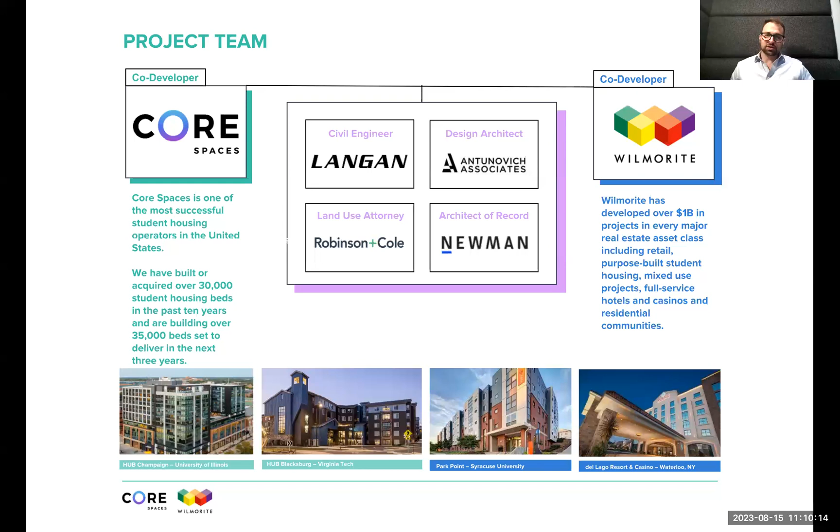We can turn it over a little bit. Yeah, let's go to the next slide. So a little bit about our business model, in case you're unfamiliar with the concept: we develop privately owned, purpose-built student housing, and we'll rent to anybody who wants to sign a lease. Our leases are a little unique in that they are by the bed and not by the unit. As part of the lease you get a bedroom and a lockable room, sometimes with an ensuite bathroom. For a 4-bedroom unit, for example, you'd have 4 different leases. It's very similar to how a dorm would work, but privately owned and privately operated.

Core Spaces owns a management company that provides the management services for our portfolio. You can see on this map we have projects across the country, operating under a brand called Hub—probably 20 different Hub branded projects nationwide. A few unique things: the leases coincide with the academic year, starting in August and running through July. All the units are fully furnished, and the buildings are heavily programmed with study areas and amenities we think would be attractive to students.

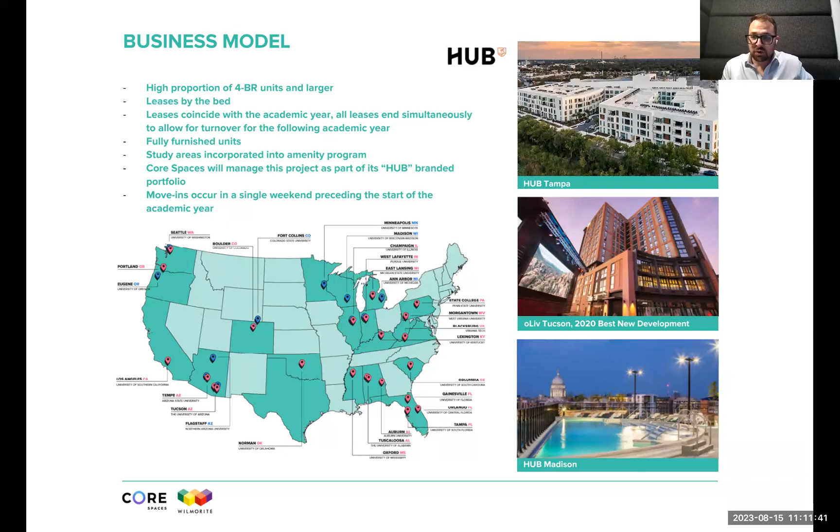And then move-ins happen all in one weekend before classes start. So it's kind of a unique product type, just to make sure that's out there.

The location of the site, I clipped the zoning map to show you where it's located and why we think it's an appropriate use. The gray is the University of Connecticut's campus, and the site is practically landlocked by the university. The Plan of Conservation and Development contemplates development at this site as a transition to campus with business and residential uses that support students. So of all the sites in Mansfield, this is a very appropriate use for this particular site, given its adjacency to campus.

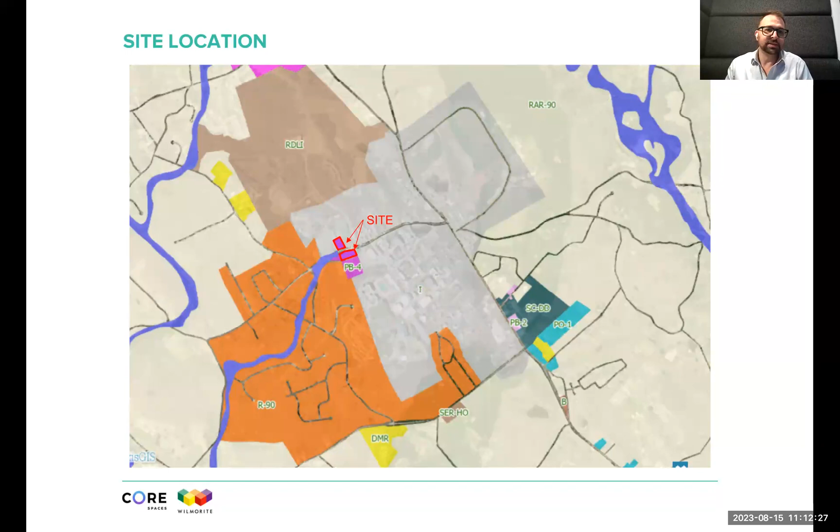Just getting into some site conditions. We have both sides of Eagleville Road. We'll refer to Site A as the south parcel, south of Eagleville Road, and Site B as the parcel north of Eagleville Road. Eagleville Brook runs underneath Eagleville Road at this stretch, so both sites slope downward towards the road, with about two levels of grade change. Site A is basically a wetland at the bottom of a hill, so it's a very challenging site, and we can only really connect to Eagleville on the right half of the site. But there is frontage on King Hill Road as well, currently improved with a small retail strip center that has a Subway and Sam's convenience store.

Site B is a commercial building that is the current home of Huskies Tavern, and they will actually be relocating to Site A as part of the project and staying involved.

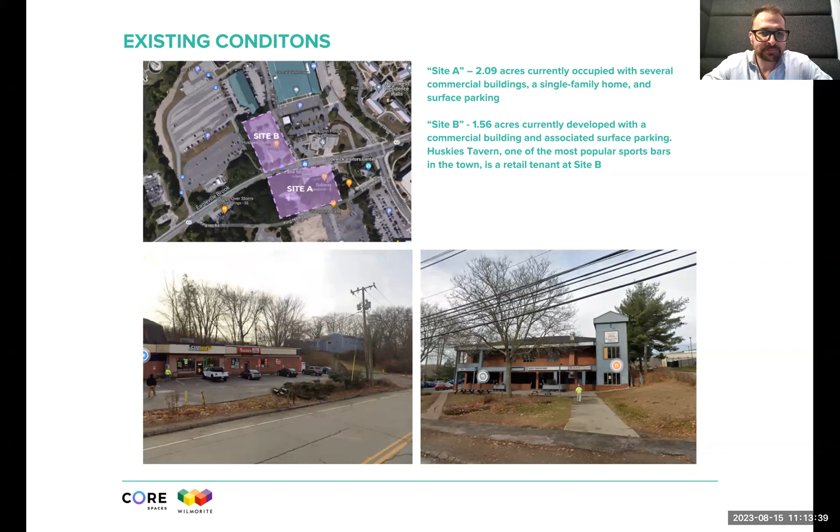My last slide before I turn it over to Antunovich. This image shows the initial renderings we presented. What you'll see going forward is imagery that has responded to a few of the peer review comments we've gotten in the meantime. But generally speaking, to get a rough idea of size and scale, it's roughly 450 units between two different sites, about half and half on each site.

You're looking at 8-story buildings, 5 stories of wood over concrete podium parking, so there's a parking deck underneath each building. We have about 13,000, almost 14,000 square feet of commercial space, about half of which is the relocated Huskies. We do have space for a few other tenants, and we're in conversations with those tenants to see if they want to stay on site as part of the project as we redevelop the space.

So with that, I'm going to turn it over to Brian. He can get into the particulars of the design, how we've conceptualized everything, and run you through it.

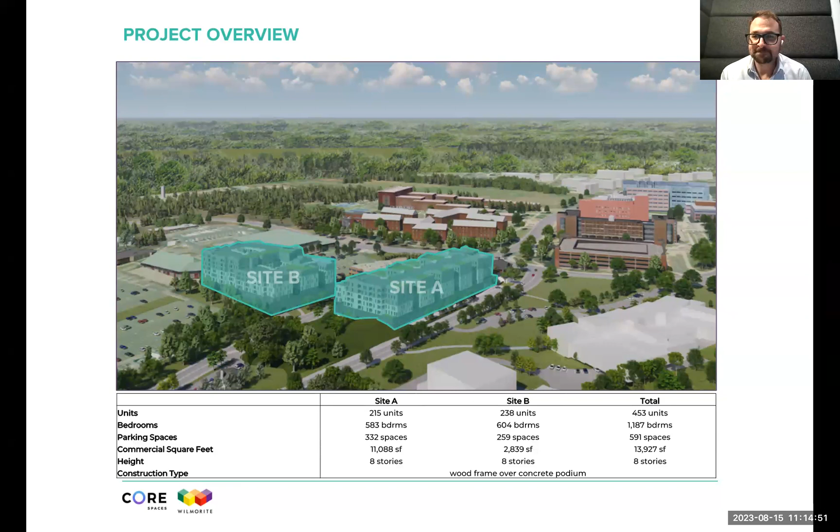Thank you, Andy, and thank you everybody for your time. Just a quick heads up, like Andy said, we've been responding to some of the planning and zoning comments as we go, and we've further developed the project since you last saw it in our original submission. Nothing major has changed—the massing has stayed the same, but we've begun to continue to articulate the exterior of the building.

Like Andy said, the site is situated in that northwest corner of the main campus, basically flanking the two sites on either side of Eagleville Road. Eagleville Road is the low point of the site, with Site A and King Hill Road being the high side, and the parking lots and university property to the north also being high.

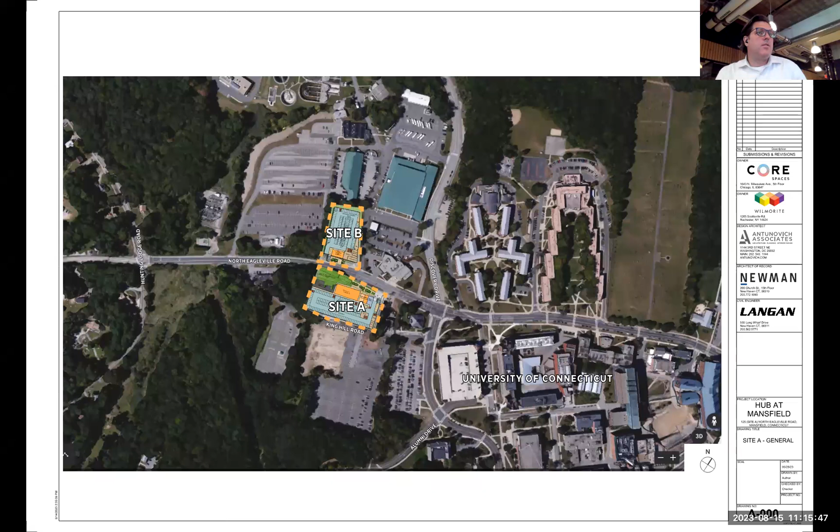So I wanted to start with an overview of where we started, maybe a 2-3 minute presentation. We looked at how the town started—a lot of New England started around mill buildings, textile mills, paper mills, those types of things. There's a beautiful elegance to a lot of those buildings, a very rhythmic method to the window openings, to the structure of the buildings, and just a beautiful scale to them. They broke them down based on function and daylight, but it created a very rhythmic and elegant building.

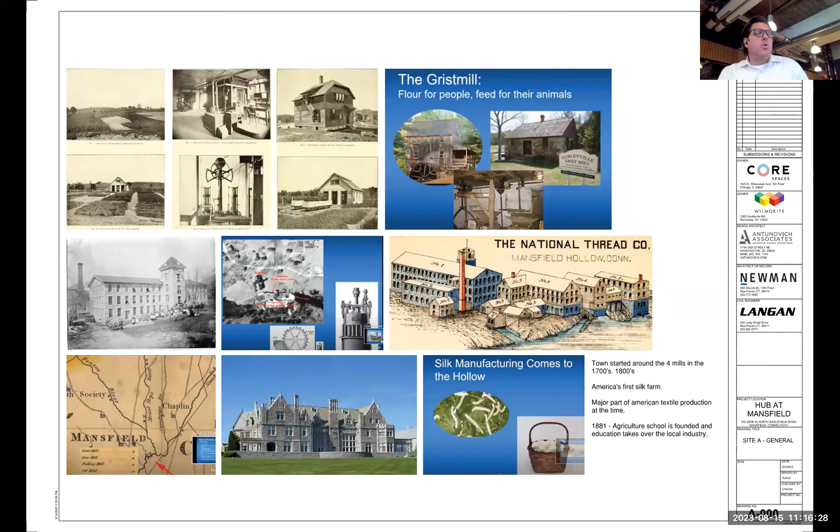So what we also started to look at was how some of those things began to replicate themselves in more of a modern sense.

Thinking about the textiles and the paper mills, the idea of variation within repetition was a quality that we started to take away and articulate on the exterior skin of these buildings, so we could provide some variables while keeping a regularity and keeping the massing understandable. We looked at projects in and around the University of Connecticut, as well as some of the vernacular you see in the surrounding areas.

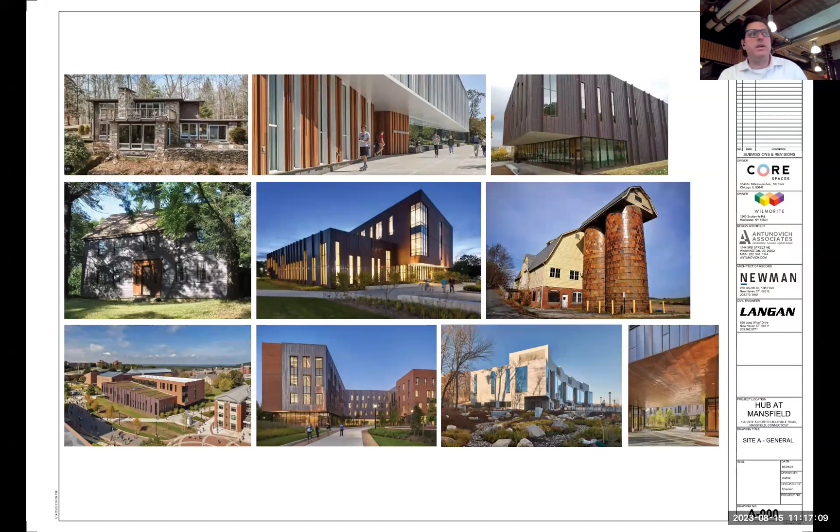And these are some additional ones that we were initially taking a look at.

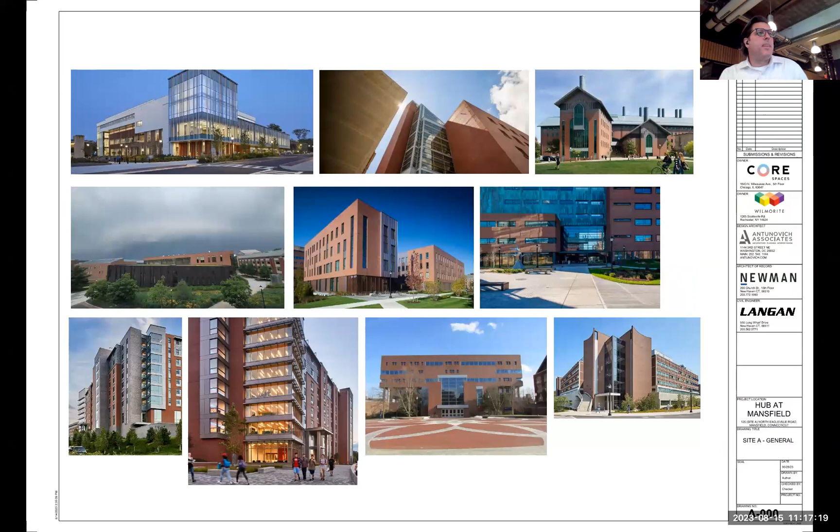And of course, obviously the culture. The culture is extremely important. It's the reason we're all here, and so we didn't want to let go of that. A lot of this building is about engaging and trying to make some type of connection to the university, as well as supporting the university's both culture and academics.

So we ended with a precedent where it was about creating a set of masses, a set of blocks similar to those original mill buildings, and weaving in, similar to the textiles, a little bit of variation within a very repetitious element.

So what I'll do is walk through Site A first, which is the building south of Eagleville Road, and we'll highlight the amenities, the plans, those types of things, and what we've progressed on the elevations.

And then we'll move on to Site B, which is a variation of a similar theme. It's a different type of building, yet we've tried to employ the same design approaches.

Our palette of materials, to start off, is a beautiful elegance and simplicity, again trending back to those mill buildings, where we have a base made of masonry brick. We're using a Hardie panel in a vertically oriented siding. We also have an EIFS panel where we're creating joints and control joints in a vertically oriented pattern. And then we're going to use a warmer metal panel cladding, showing a copper-esque color here that will also accentuate some of the entry points of the buildings.

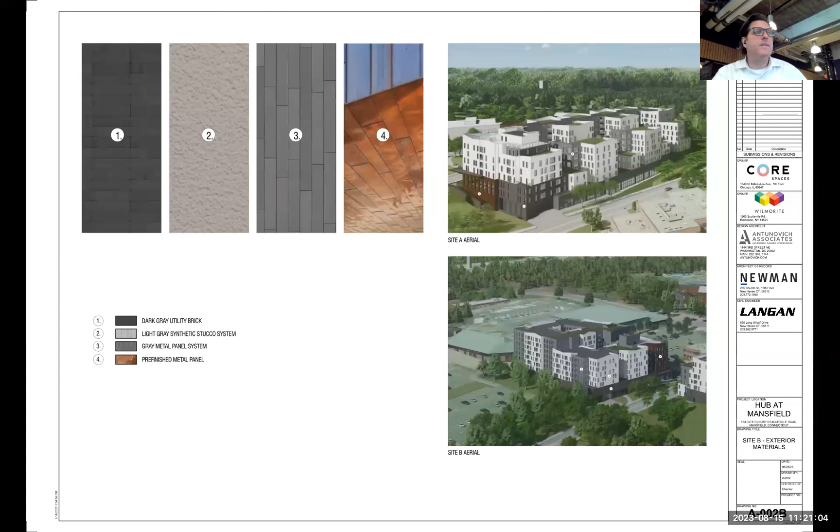So this is that overall aerial view. You can see here's that accent point with the warmer metallic color, and there's the second entry point right there. We're going to continue to zoom in as we make our way through the presentation. You can see the masonry brick that wraps the bottom, the darker Hardie panel, and the lighter EIFS color.

So Jennifer, we know we're currently working on getting Ted's into the rendering. We know it's not there right now, but we couldn't get it in since yesterday. But we are working on it. So the package you will see on the 18th will have Ted's put back in.

It is missing. We know it's supposed to go right about there, but it helps us kind of show the overall mass. Thank you for changing the rendering to more accurately show the context of the parking, et cetera, than what we saw.

Absolutely. And so what we've chosen to do as an overall, as you can kind of see from these images, is we have a very regular and rhythmic set of bays or bars on the building so that we can create courtyards and get natural light into the interiors of the buildings. And that is somewhat reminiscent of that rhythmic nature of kind of that original mill building.

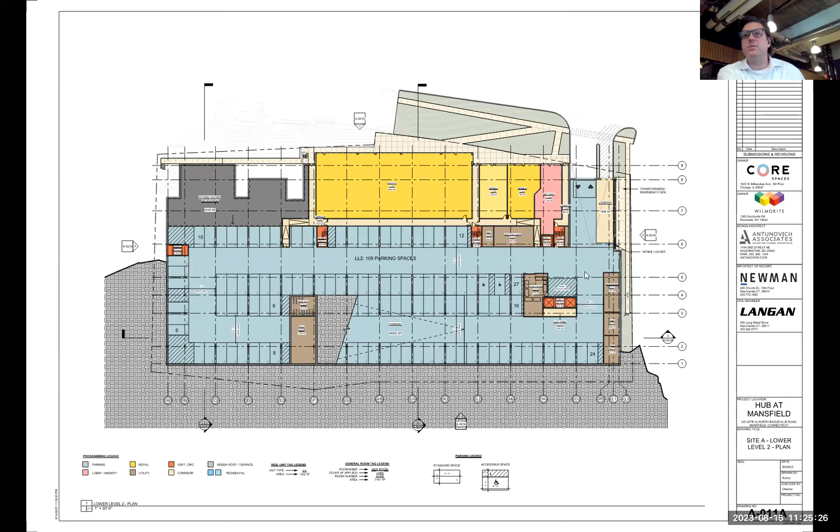Just to jump back, that's along King Hill. Right, we also have all of our loading and trash all done on site within the building. So actually the floor to floors on this lower level are high enough where the trash trucks can actually drive into the building and actually pick up the trash and then leave.

So as we make our way up, the liner units continue on the 3rd floor. This is the last floor of parking. You can see we have a 2-story space in part of our lobby, to continue to kind of accentuate and welcome. And when we get to the elevations and the renderings, we try to open up that elevation to kind of be a little bit more welcoming.

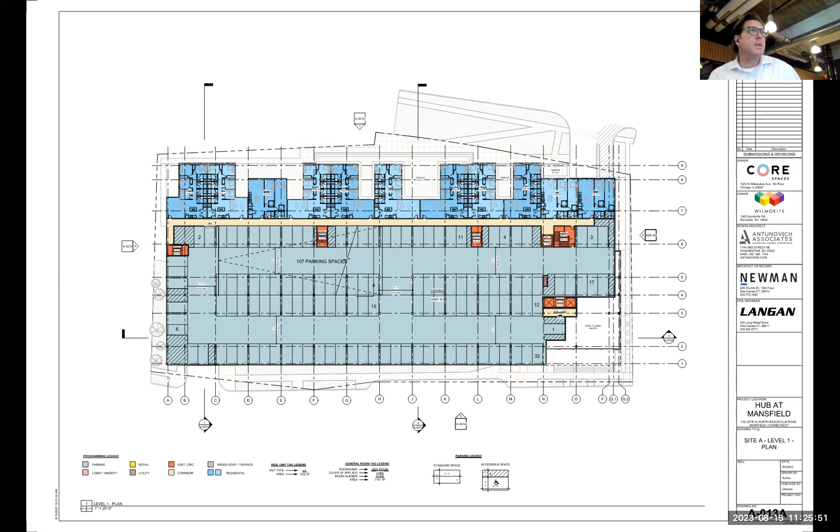And then as we make our way up, you can start to see we have these internal courtyards that have a series of terraces on them for some of the units as we make our way up. And can you tell us if there's access from the units to that green space, to those, are those little light yellow areas balconies? What's the access to the green space for the residents?

So the access to the green space is going to be a green roof. We're likely going to be using it for stormwater management. It'll likely not have much activity on it, but what you identified as the yellow spaces, those are terraces, so that somebody can go out and there's a designated area for that unit to be able to go out and actually enjoy the exterior.

They're not going to be able to walk on the actual roofing, the green portions. It's just to be looked at, and we're using it also for stormwater management purposes.

And then as we make our way up, this is the building starting to set back. There are going to be a few areas on that upper roof where we need small condenser units, roughly 3 to 4 feet tall, maybe 8 to 10 per area, that service those lower liner units on the 2nd and 3rd floor. We will screen them. We're going to do it on this level.

We're actually going to do both a setback, a 1-to-1 setback from the property edge, as well as potentially put some screening around it, so that when you're looking out upon those areas, you will not be staring at a mechanical piece of equipment.

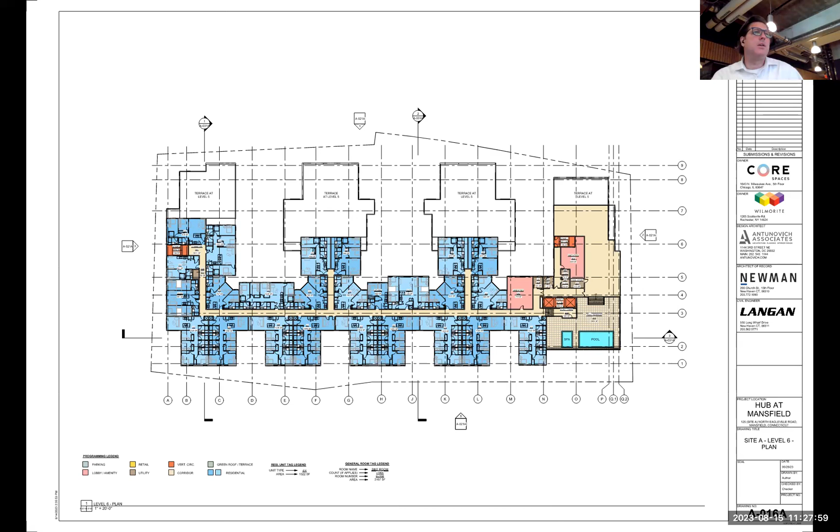And then obviously on the top, we are going to have some green roof as well. Similarly, we have large fresh air units that will be screened, roughly 8 feet tall once you get them on the curb. And all of the lower condenser units will have a 1-to-1 setback so that nothing will be visible from the street below.

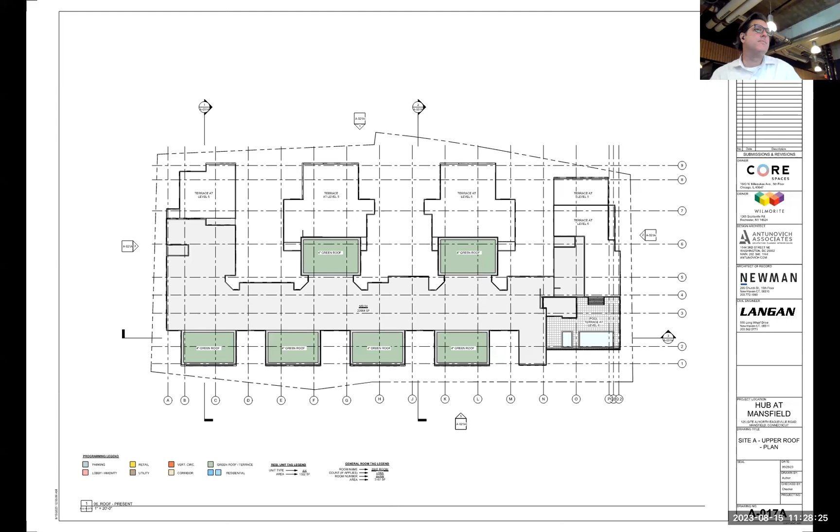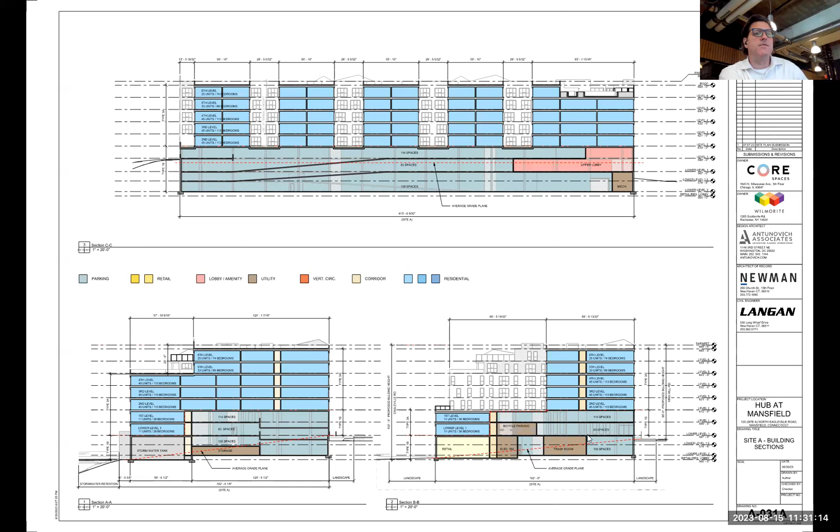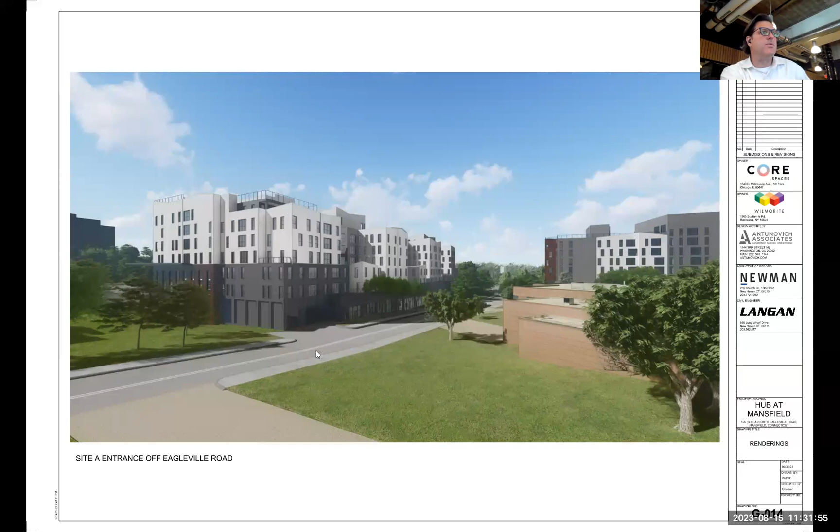So this is our break, and we come around the building from there. Here's that back entrance looking at Eagleville, looking up at Kinghill Road. This is the entrance with that warm metal element, the winged canopy, as well as looking into the 2-story lobby and the entry point.

This is that large wall we talked about earlier, which is basically the parking garage. We don't want to open it up because, one, I don't want headlights pointing out and shooting at the new science center across the way, and also we think we can play with the articulation of the masonry, that beautiful rhythm of a mill-esque building, and cover the foreground with ornamental trees and ground cover to make it a pleasant experience along Eagleville.

So I'll just point out on that rendering, although you corrected the parking in the other view, it's not corrected here. Oh, you mean the adjacent parking? Yeah, I've got to get some plans of that. I apologize, we need to get the new plans from the science center.

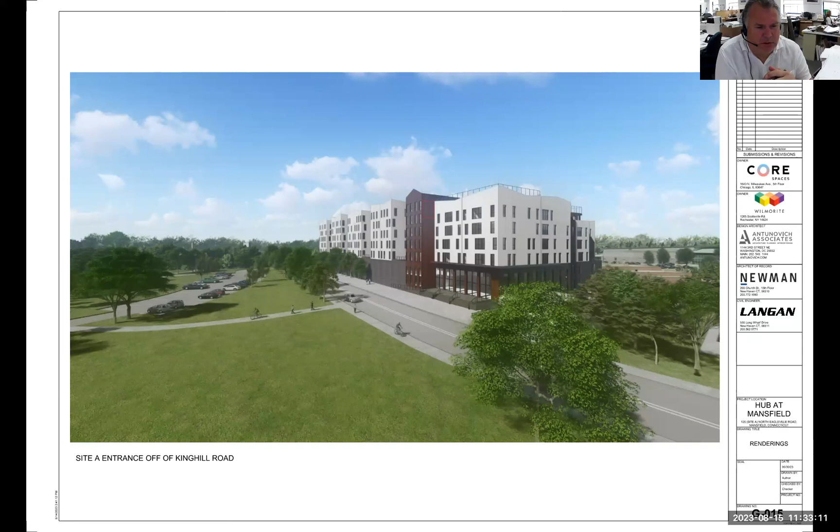I have a question, just so this rendering accurately reflects what's actually there. I can't remember, it's changed so much in the past year. Does it look quite like this though? Not at all. I didn't think so.

Here, I actually pulled up the plan. It didn't look like this before, and it doesn't look like it now either. You're talking about this one right here.

So we tried to mimic that kind of curved parking lot that's there. It's fairly close to what is there because you can't see the science building beyond. Our site is right here, and so what we're seeing is roughly this small wedge of green space in the foreground. So if I jump back, that's us trying to mimic that parking lot and that green space.

We don't have the landscaping quite right, we can probably upgrade some of that. Potentially this distance isn't as large as we're illustrating, but it's fairly close. In this rendering, we wouldn't see the new science center, it's several hundred feet to the left.

It's safe to say on record you are showing in these renderings that we will not see any mechanical equipment popping up above the roof line all the way around the building, correct? Correct. We do have some elevator overruns and things of that nature that, depending on your vantage point, this one you can see there's really nothing, and I'm probably floating about 30 feet in the air. So we're very confident we won't be able to see any mechanics from ground level walking on the sidewalk.

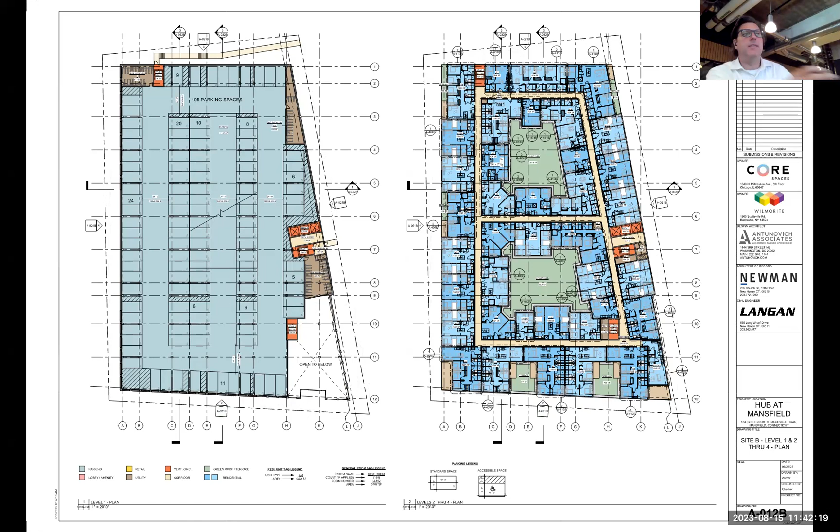As we make our way up, similar to building site A, there are three levels of parking, and then we make our way up to the residential units as the building rises. Near the top, they set back — that white area should actually be hatched as a roof terrace, our public amenity on the roof of this building.

There is an additional roof terrace similar to site A on this building. Can you zoom in on the either side, left or right, the corridor?

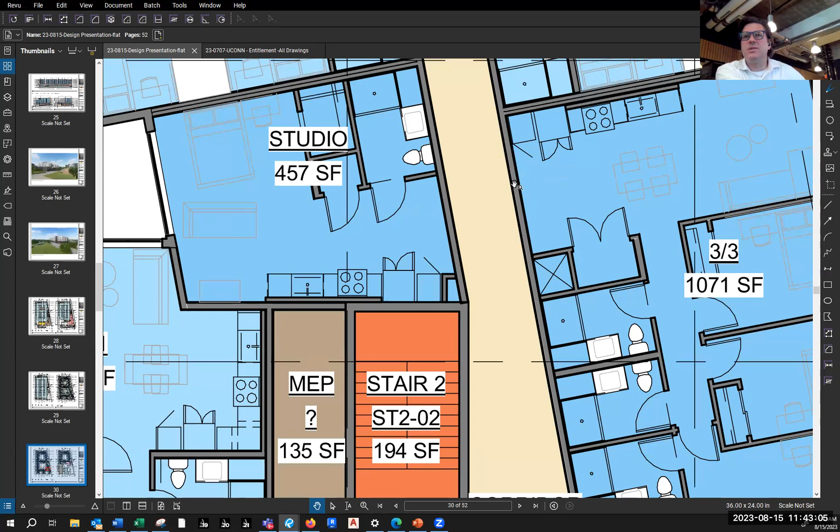Where are the doors to the apartments off the corridor? We can add them in — I recognize we don't have them. That was one of the comments they sent us. We did the unit designs and all of those things, but we still need to add that. So by Friday, we'll have those doors located on all the plans. I noticed it's on a number of plans, not just this one.

So making our way through, we also have green roofs on both the upper and lower level, similar to Site A. We're going to screen the large fresh air units and set them back, and we're also going to set back all of the lower, smaller condenser units.

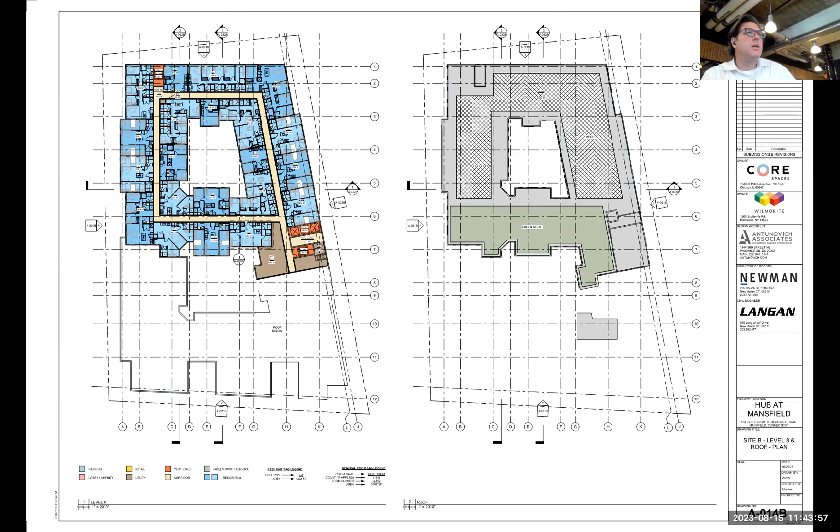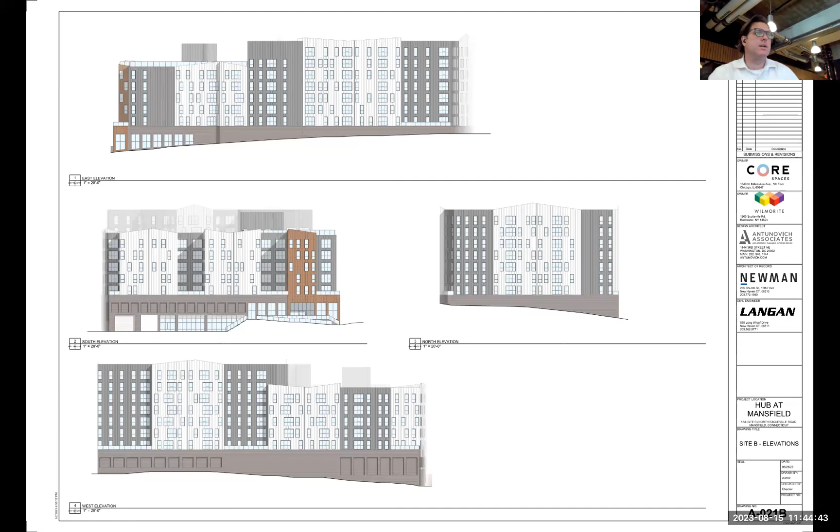On this elevation, you can see we employed the same window organization strategy: in the darker Hardie panel skins, very regularized windows stacked relative to the unit plans, and in the lighter warm gray components, we randomized them to get that variation within repetition. This building didn't have as much in-and-out, especially along the two sides facing Ledoyt and the parking lot, so we used light and dark elements to break up the massing. Similar to Site A, we landed that warm metallic color right at the front door.

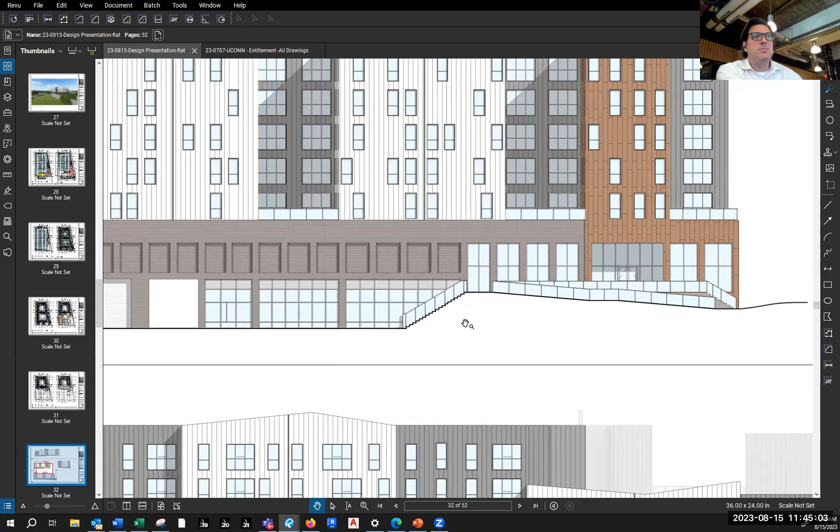This is kind of how the grades are fleshing out. You can see that's the retail space below, there's the stair, that's the handicap ramp, and that's the front porch.

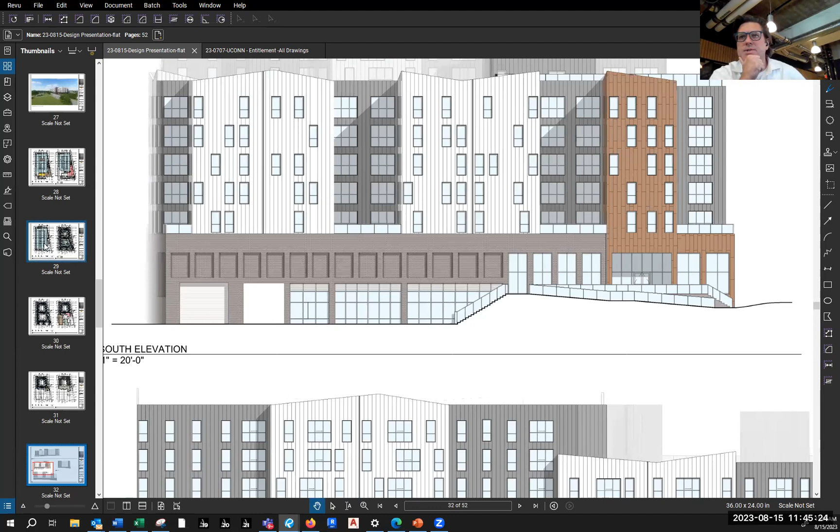Those two garage doors — does the one on the right go to the first level and the one on the left go up very steeply to the second level? It doesn't go up steeply; all the ramps inside the parking garage are roughly 5%, so they're not steep at all because we're parking on the ramp. But is it correct that the left door goes directly up to the second level? No, they both enter in right here.

So this is more like a loading dock and allows a loading or trash truck to pull in and out. This is a two-way entrance for the patrons and the residents.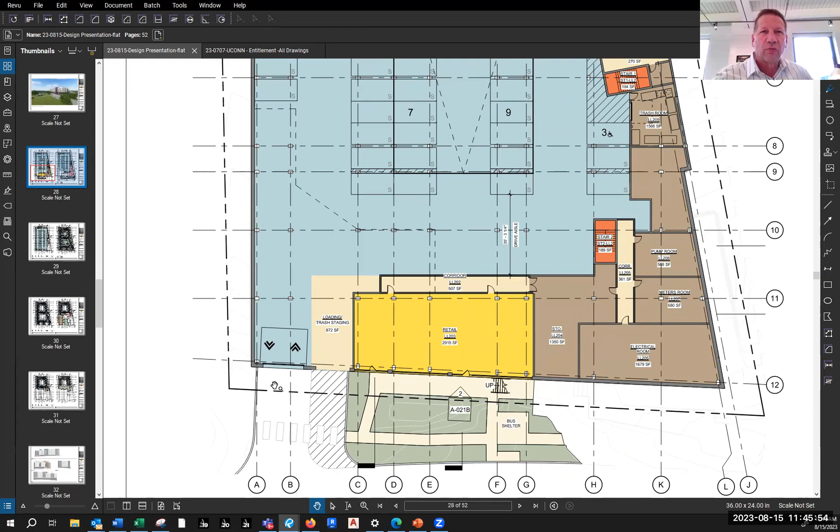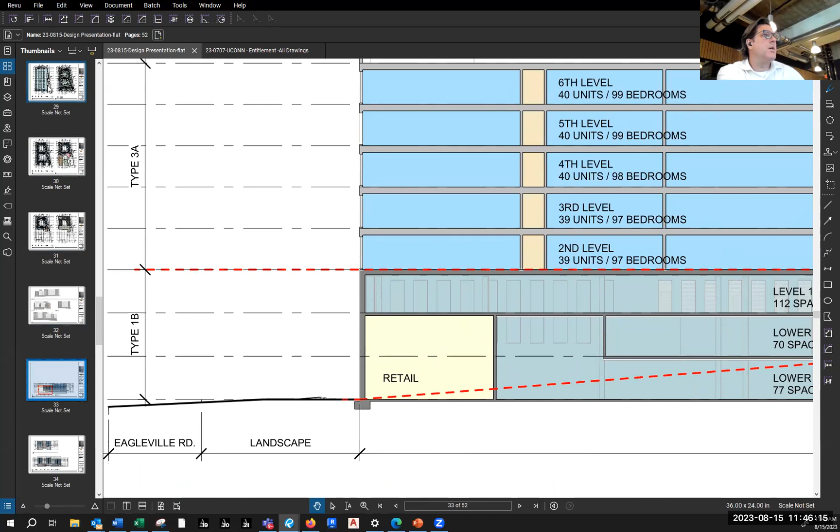One thing that may not be clear is that when you pull in, it's actually two stories to allow for the height of the trucks. There's a section, and if you go to the second floor, you'll see there's an area carved out to accommodate that height. On the plan it might be helpful to see. The other garage we just gave more height on the first floor to accommodate it because we had the retail, some big retail spaces, but this one we had to carve that out.

Thanks, Joe. All right.

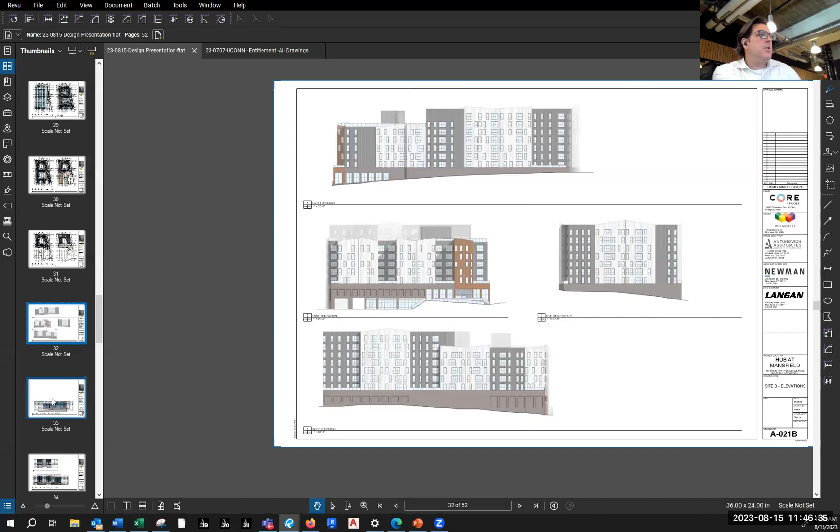Okay, so again, here is the section of the building. We're starting to illustrate the overall stacking of it — it's five over two. These are some of the internal courtyards, and you can start to see the sections and the ramps. This is that retail space on the lower level; it's actually a two-story retail space, though usually it's still just one story.

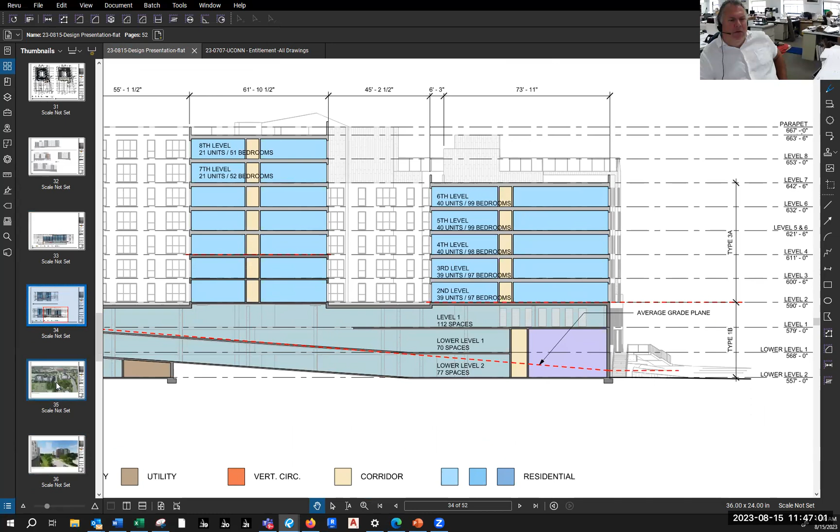What are the floor to floor heights between lower level 2 and level 1, with 112 spaces? That's 11 feet.

Now you know that slab has to have a certain rating, right? Yep, for the parking, and there's going to be a lot of structure in there. Yeah, it's the transfer deck. So that's going to be a low ceiling. It got stepped down there too for that extensive green roof.

We think we can still maintain above 8'2" on that level, but none of the handicap vans will actually be on that level. So the 2 lower levels are the 2 accessible levels we talked about where the accessible parking is.

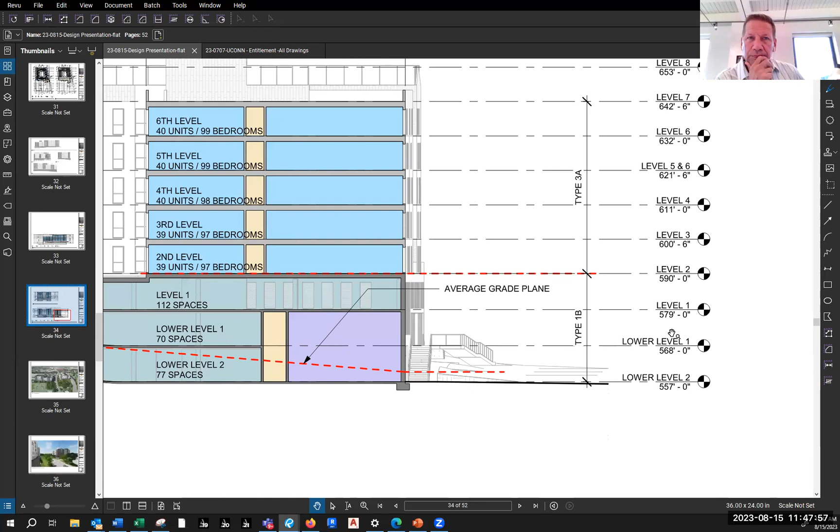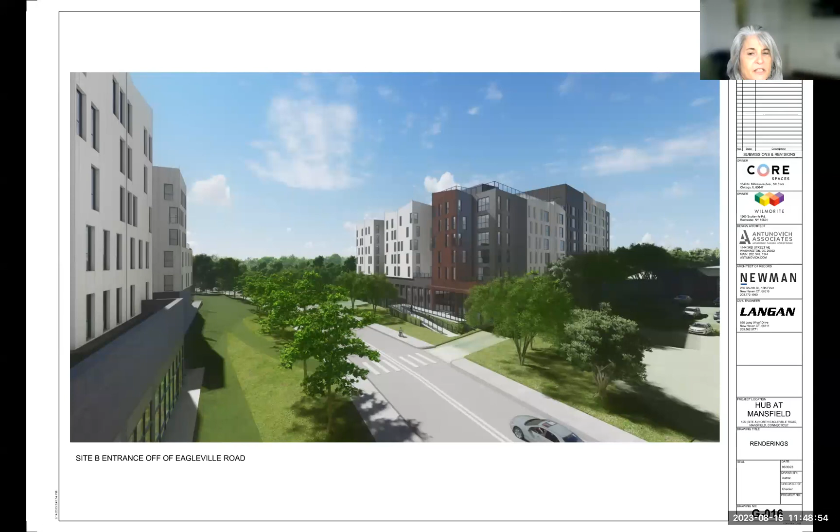Just orient me here, please. Is this heading towards campus from King Hill Road? This is actually, let me jump back a slide. If I were standing, I'm roughly in the middle of the road looking back at B, so I'm looking west. This is me looking east back towards the campus, you can see the campus off in the distance. This is the other side of the building, so the firehouse is basically right here. And I'm looking back at the building, with building site A in the foreground on your left.

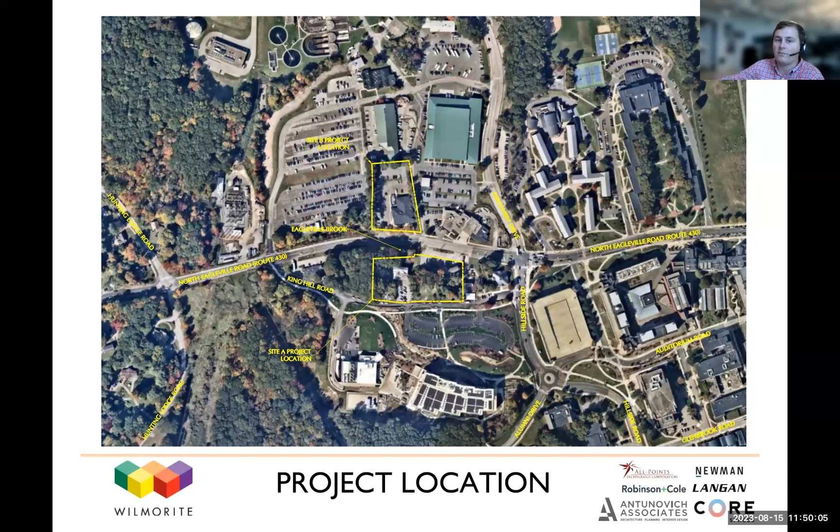Site B is to the north of North Eagleville Road, and Site A is to the south. We're going to start talking about Site A. That's just the addresses, 125 North Eagleville Road and a couple parcels on King Hill Road.

So the majority of the site is actually building. As Brian mentioned, we have the main entryway on North Eagleville Road on the very east part of the site, and that's going to be for most of your cars and all of your ambulance for emergency or trash pickup.

But we also have a vehicle entrance on the southwest of the site, and that's only going to be a car entryway. We have a car drop off down there as well as the fire lane that we've coordinated with Mansfield's fire department.

We do have sidewalks and stairs available all around the site, just for access to be able to cross here, because in the existing site conditions there were dirt paths and other ways for students to cut across here. So we're trying to keep that similar to make it as easy as possible.

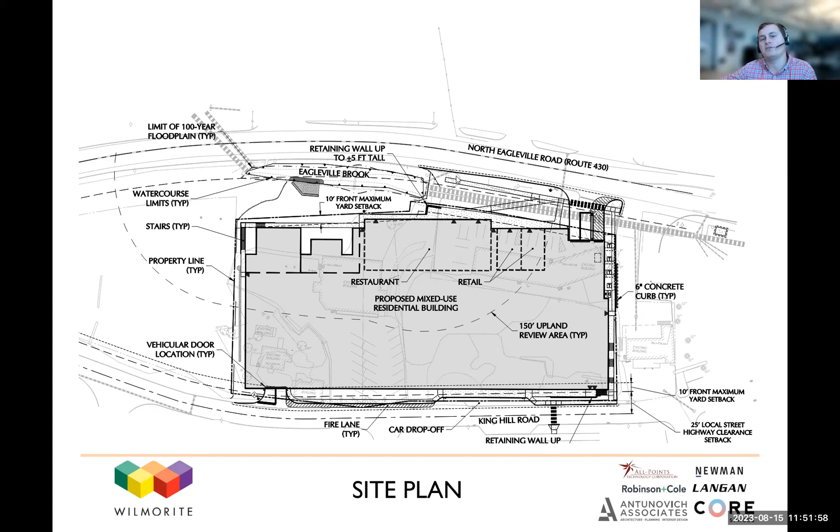We also added a crosswalk to the south of the site so that we could get to the new bus stop that was part of the project to the south of the site. We'll talk about more of that in a second.

Now, our site is part of the Eagleville TMDL district, so we tried our best to make sure we were implementing as much stormwater management features as possible to be sure the water that empties into Eagleville Brook is as clean as possible.

The major way we're doing that is our green roof. But in addition, we have a below grade detention system to allow for flows to decrease from the existing condition, as well as a water quality unit, just to be sure we are cleaning the water as much as possible.

We also have 4-foot deep sumped and hooded catch basins, as well as French drains on the east and west of the site to allow for infiltration.

And that's going to be very important, right? Oh, definitely. And all the pipes have been accurately sized, all the flows have decreased. We actually decreased all the flows in all the watersheds.

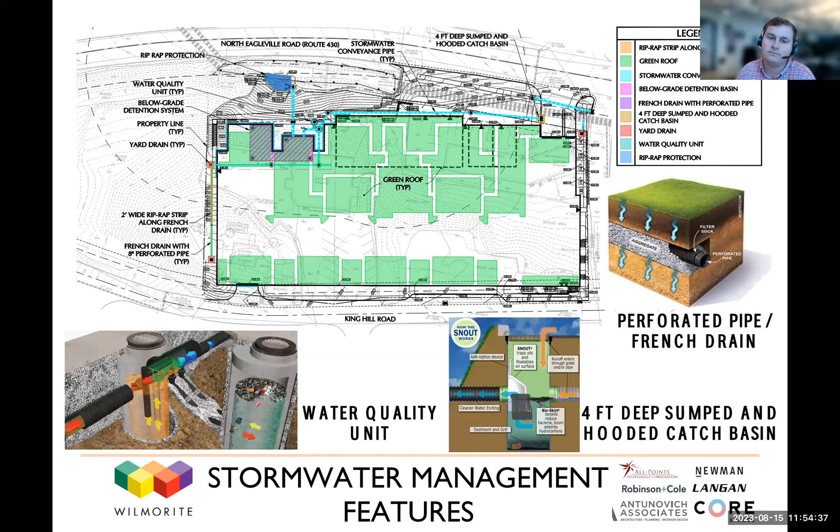So just to walk through Site A: to the north, near Eagleville Brook, we collaborated with All Points Technology Corporation on planting restoration in this location, as well as all sheet notes and directives for restoration and maintenance. Moving to the north, we brought in curvilinear plantings that are shade or partial shade tolerant, adding trees and vegetation for height.

To the south along King Hill Road, as Brian walked you through, in areas with more limited windows and more solid facade, we've integrated some sweet gum, some serviceberry, and more structured planting at the ground level to break that up a bit.

Near the drop-off, close to the main entry, we've provided about a 10-foot, face of curb to facade, generous drop-off area. As Brian walked you through in both Site A and Site B, we're providing that 10-foot area for all the movement and access of residents.

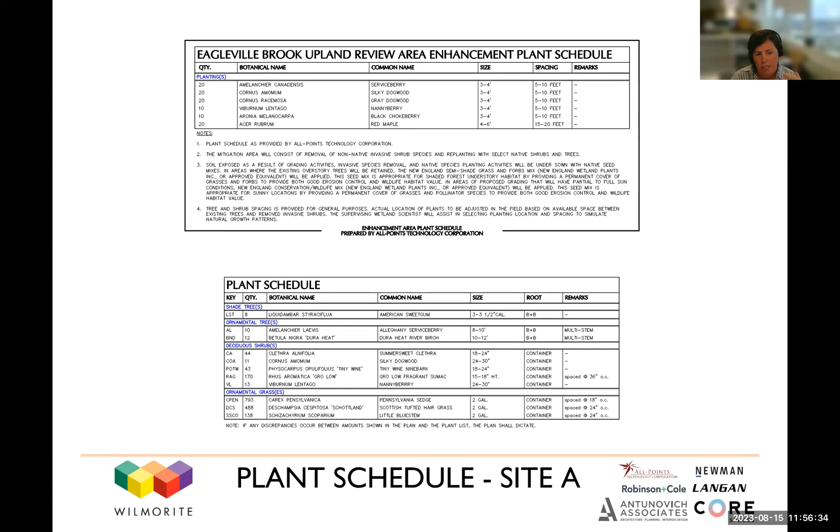We're also adding, on the next slide, a green roof plant schedule. This is recently planted on the Wesleyan University campus that we're working on. We collaborated with GreenGrid Roofs to come up with this mix and this grid system—they come in 4 inches or just 2.5 inches, so they have a variety of options. You can see the gravel provides circulation as necessary for maintenance and access.

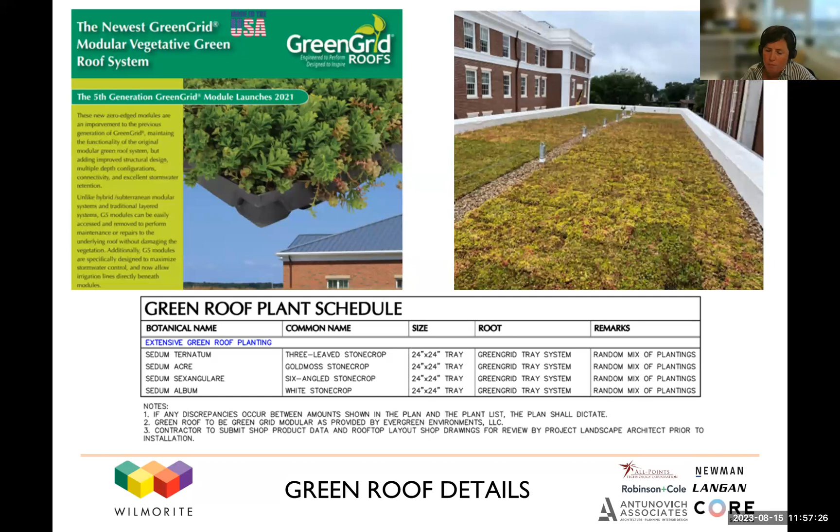It was a combination of sedums, and really working with these manufacturers to assure we're integrated with the latest technology, the latest plantings, and the best plants for the Northeast and for the project specifically. If we keep going, on to Site B.

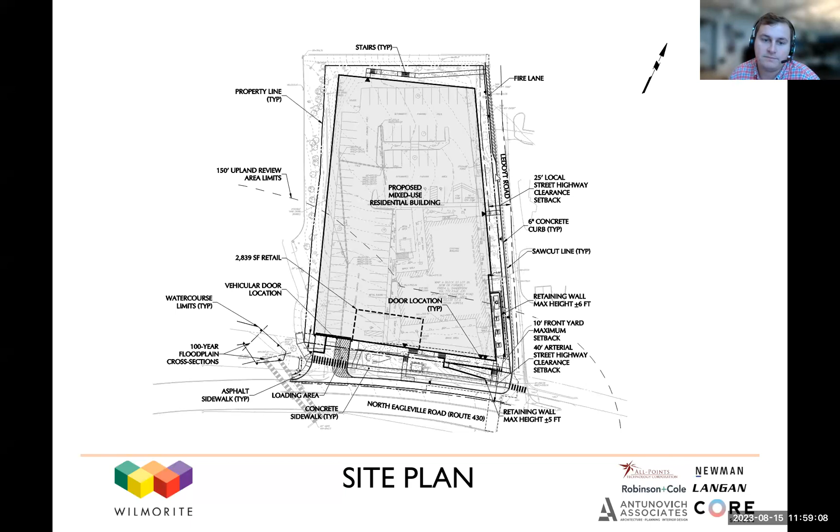Yeah, we could go to the next one. Also very similar to the last site, we have our major green roof, as well as the 4-foot deep sump and hooded catch basins—another water quality unit used before going into the detention system to allow for cleaner runoff, and then the detention system to decrease those flows into the existing Eagleville Brook discharge point.

On the site, we also had room for a rain garden in the front, which Kristen will get to a little more with the planting on that. But can you just talk about that detention system a little bit—is that inside the building? Is that in the parking area? What's going on there?

So it's actually below the building. Brian might be able to give a little more detail on that. It's a pre-manufactured system that we worked pretty closely with Langan on, but it will be below the slab on grade as you enter into the parking garage. Yes—sorry, Kathy, you're on mute.

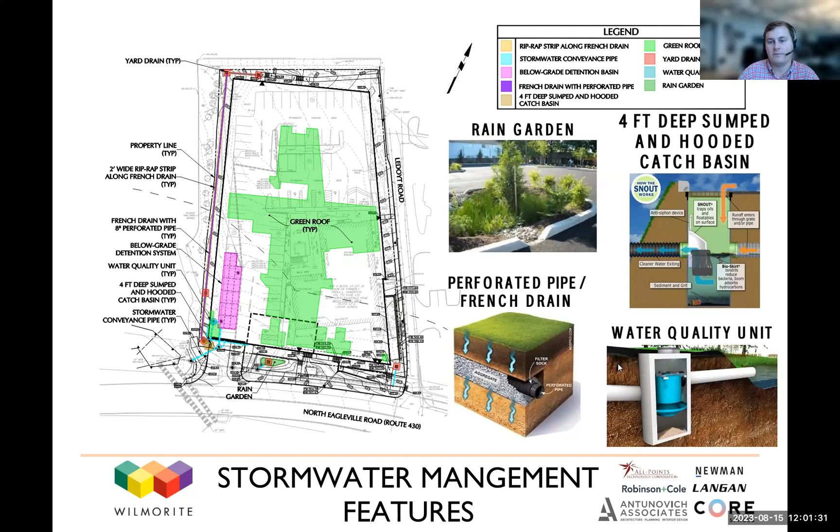Brian. And then also similarly, we have the perforated French drain just going along the northwestern corner and down the side of the western part of the site, just to help with runoff going west and keeping it on site. And then I think we go on to the next slide.

Hi again. So to start off on North Eagleville Road, we have a combination there of some larger shade trees and then serviceberry, shown as some of those smaller circles. The serviceberry creates a nice multi-stem interest in the winter, and a bit of an airiness when it has leaves on it, a nice native plant adjacent to the rain garden, placed strategically along that facade.

Yes, thank you. And then to the east of the building, I believe that was pin oaks. So we have a nice row of pin oaks in that corner, to the east side where you're pointing. We have a series running along the building facade there, about 10 pin oaks in the corner, especially where it's a bit more solid, creating a nice canopy and breaking up that architecture.

And then on the west side, we're assuring that we're maintaining those existing mature trees that range anywhere up to 18 inches, on the adjacent property. So looking at that tree protection, and then more understory plantings where we have a meadow mix, with a mix there of plantings.

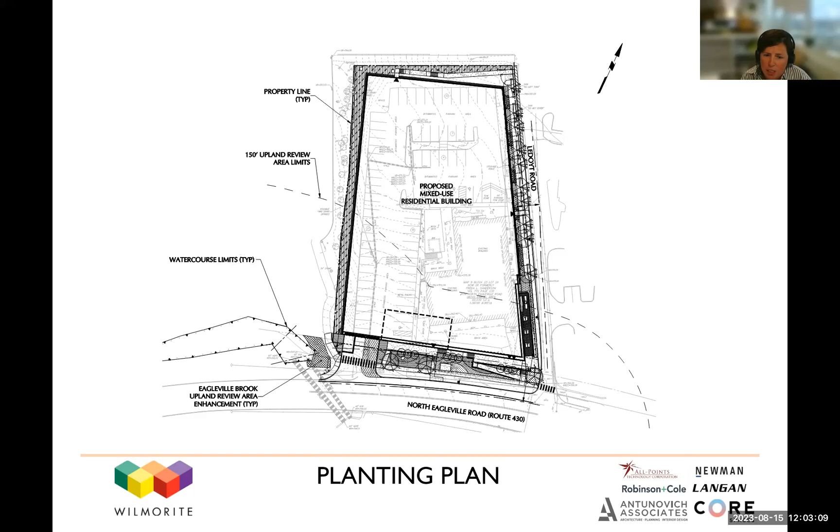That pretty much covers the planting design. If we could go to the next page. This again is just the combination enhancement plant schedule, our detailed plant schedule that we include on our sheets. And then the green roof, same idea, similar to site A.

So working to assure we have a great mix of plants that thrive in the Northeast, which we've done on a lot of recent projects, with a small, lower profile, 4-inch profile. So you have some very steep areas that you're planting. What are you planting on those? And how do you, I mean, we've all seen that runoff in other cases. How do you plan to maintain that?

So in many areas, we have tried to work towards a 3-to-1, so where we could plant some trees, some larger vegetation to have that rooted in there. We then do have a meadow mix. So working with the contractor to assure we've had successes on many other projects, and the timing of planting, assuring we're not placing that on major rain events that we've been seeing recently. But yes, working with the contractor to assure that, and we have that noted in specifications and on our drawings.

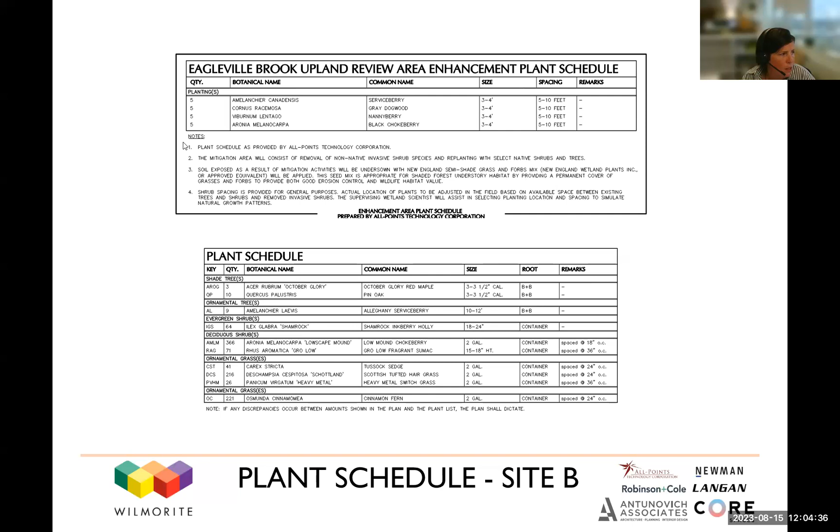So what's the plant material on those steep slopes? Let's go to site B. So we have this labeled as Meadow Mix A, which we have noted, if we plan to go to— actually we don't have this in the slideshow, but I can just list off. So it's a combination of native materials, a mix we've used on many campuses and many projects. It's a combination of, I'll just list a few, blue stem, some perennials, grasses, and a variety of native materials, but the majority would be switchgrass, blue stem, and some wild rye, Virginia wild rye.

So that's located, just to be clear, on the west side of this building. Do you see that hatch right there? That's where that meadow mix that I was just describing is located. In other places, they're individually planted, where you're seeing the other hatches—those are individually planted, either ground plantings or shrubs, mainly shrubs that are listed in the plant schedule.

I have one question. Yes. There's a group of—this area, the parcel that is owned by UConn that you abut, it is my recollection that it has very mature trees. So how are you going to protect those trees on the UConn property?

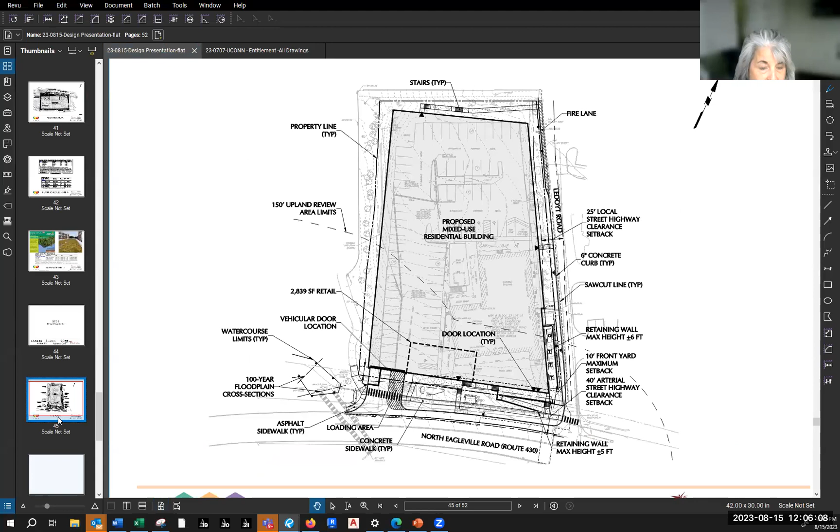You're talking about this side right here? Yeah. So we are noting tree protection fencing that we would work on day one, identifying some of those root zones and working with the contractor day one to assure we are protecting those trees.

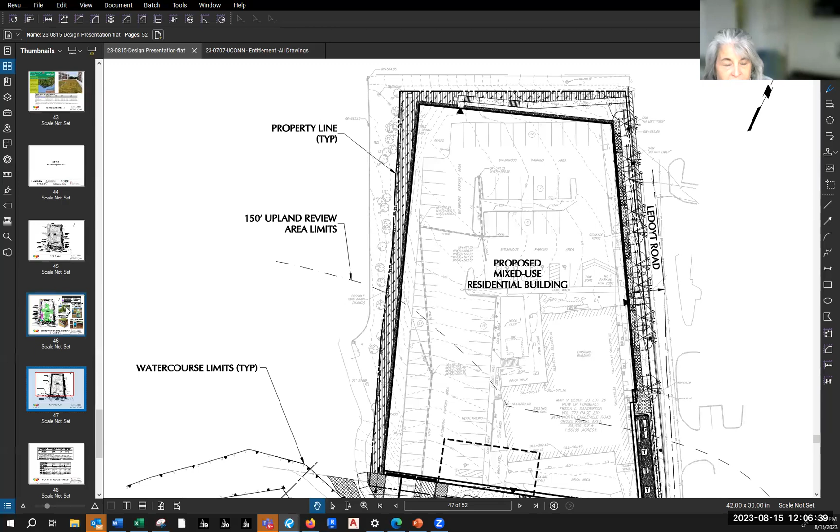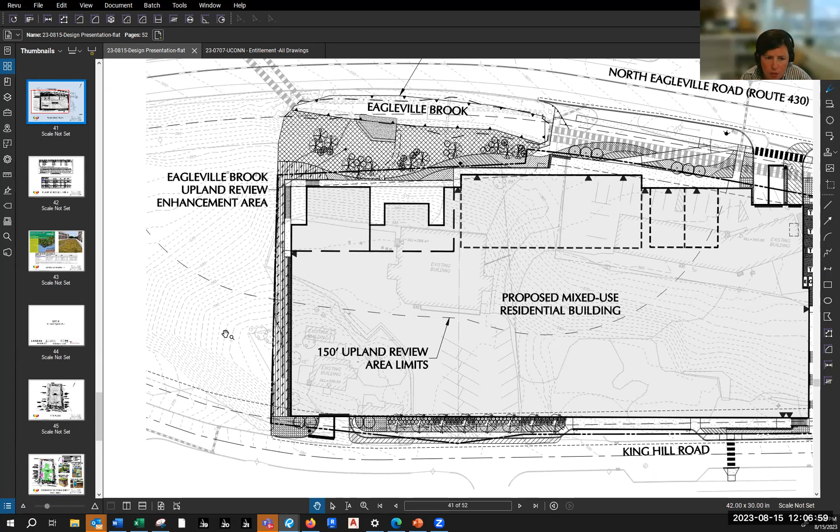Okay, great. And then also on the other UConn site across the street, site A, you're doing something similar? Yeah, it's a similarly steep slope with mature trees. So all grading is within the property boundary, no impact outside of that. And then yes, I think if we zoom in there should be protection fencing. If not, we can add that in this upcoming resubmission.

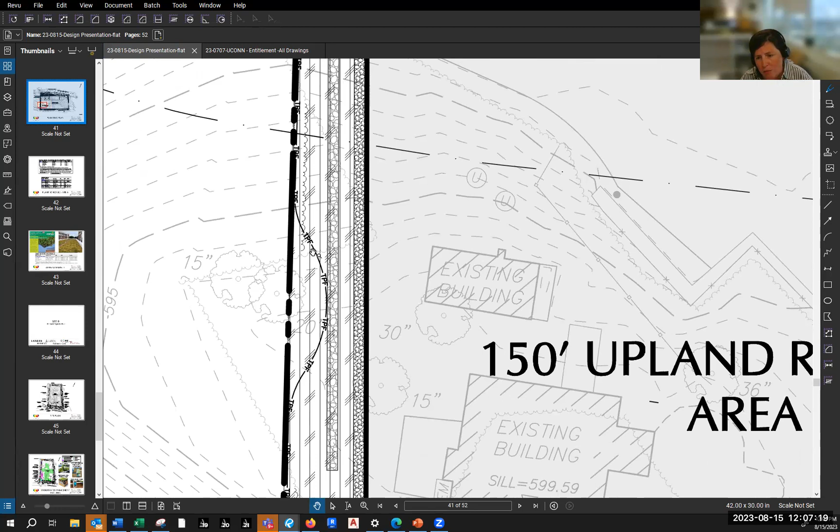And then what's not noted is site lighting. There were some comments that came back, which were great. We're already modifying, and we'll be having that in this upcoming submission. We'll have some modifications to assure no light spilling onto, limiting or eliminating light spill onto adjacent properties.

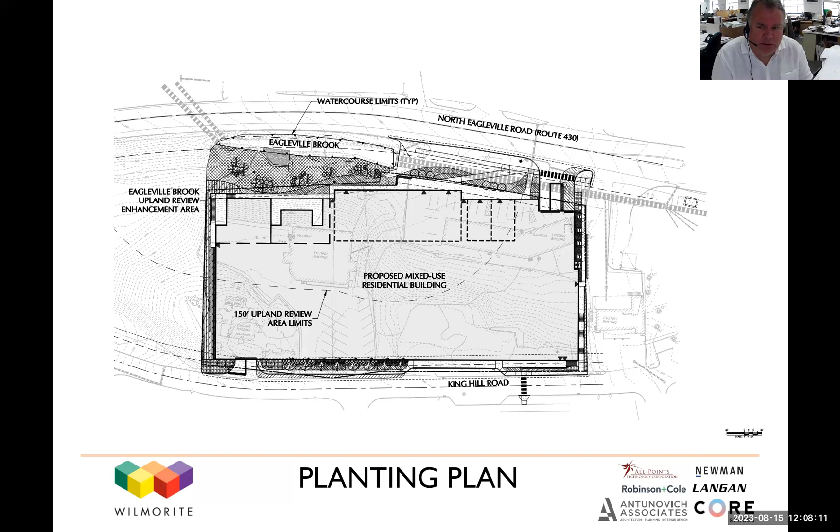Besides it, this whole project feels pretty dense, very dense. I was reading the Weston and Sampson report, and I just want to be assured that you're going to address every one of those items that they have in their report, correct? Correct.

As I said before we started this meeting, we had a meeting with Weston and Sampson and the applicants, and the applicants will be submitting revised plans and comments, I believe, on Friday. So, correct.

And presumably those will address the comments we have yet to make. Yes, we'll make sure that those are on the record. Whether or not the applicant team is able to address them by Friday, we're not sure.

And if we have an issue, we'll absolutely let you know that we're working on this one element, because I don't want to miss the 18th deadline. But if you make a comment today that we're not able to address in the next 3 days, we'll certainly let you know what we plan to do and at least write a narrative.

Well, I have one question about the plant materials. Because some of those plants will be planted under the building overhang, or in areas that might be a bit shady. Yeah, on the north side. Have you thought about plant materials that might be shade tolerant? I understand there's some meadow mix that might not be impacted greatly, but for the taller trees, are they shade tolerant?

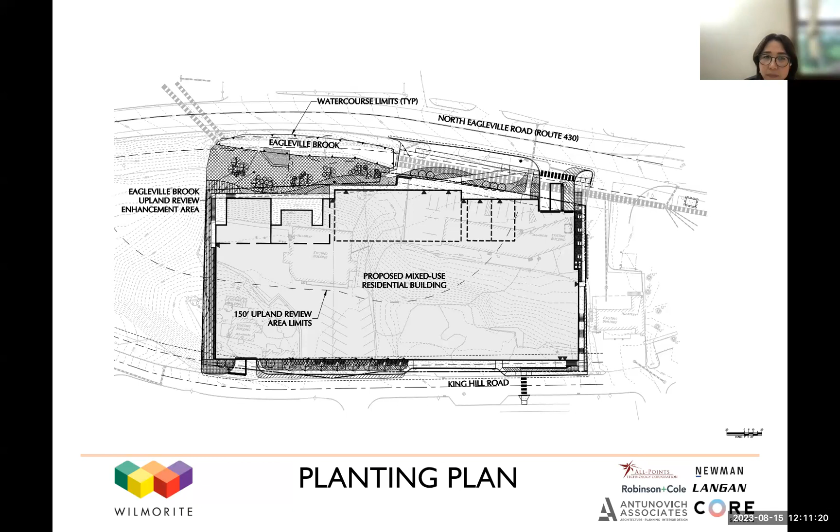So I'm just wondering, I know somebody mentioned about the surface materials and the imperviousness versus perviousness. Have you ever thought about the trade-off between the increase of impervious cover versus the green cover that might be provided by green roofs? Could you repeat that last part for the group?

Sure, so you have green roofs in both buildings. And I know that's not intensive or extensive, so you can have ground covers such as sedums and other species, which might be helpful for runoff that will eventually be going to the Eagleville Brook. And at the same time, you're establishing a building which will increase the imperviousness. So have you calculated the trade-offs?

So the green roofs, the intention was both from an aesthetic purpose, and as you mentioned, reduction in impervious surfaces, also heat island reduction, so that is a green space, having that more natural material. And then from a treatment standpoint, an improvement in the outflow. So really we thought about it from multiple angles there.

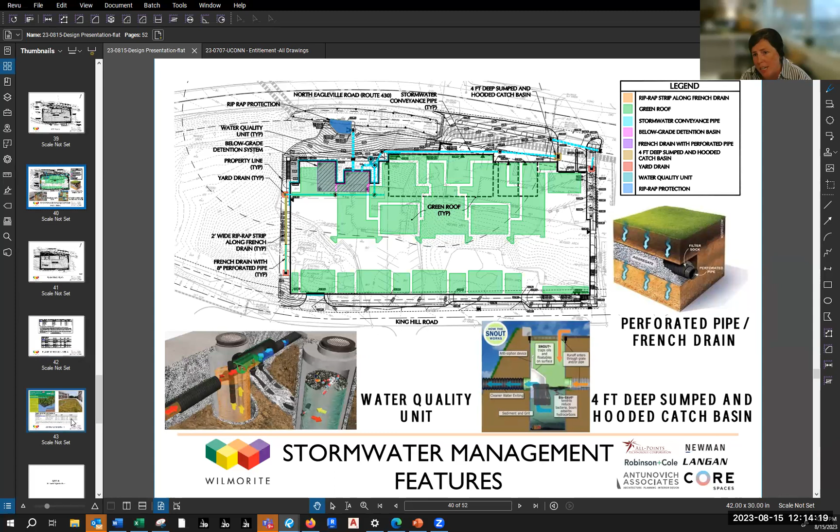How do you maintain them? We have, for instance, that picture we were showing, there is an integrated irrigation system. The whole idea, the intent, is that they're limited maintenance. The access, you can see, for instance, on the upper right, having that aggregate path - I was just walking on it the other day. So there's that access in the center and on the edges with the gravel, and otherwise the planting really is intended to be low maintenance.

You can see, I think it might be in the brochure there, that you can have irrigation lines directly beneath and within the modules, so they're integrated into the system. Again, the whole idea is the hands-off ease of maintenance.

I would definitely, instead of using the word could, be more assured if you thought about that, because I've done a number of schools in the state where if maintenance isn't part of this, whether it's intensive or extensive, you still have to think about it, because the last thing you want is nothing growing and it becomes an awful eyesore out there and a fire hazard. So I would definitely consider that. I think it's a great idea, I love green roofs, but you have to make sure you fold that maintenance component in.

So is there any sort of maintenance plan that was submitted, Kristen? I don't believe we included the notes - it's something we could note here. I would absolutely do that, make sure it's called out. Oh, my apologies, we do have landscape maintenance notes in here, and we note during construction, lawn maintenance, but we could add a few notes for the green roof itself, which we could add and take note of.

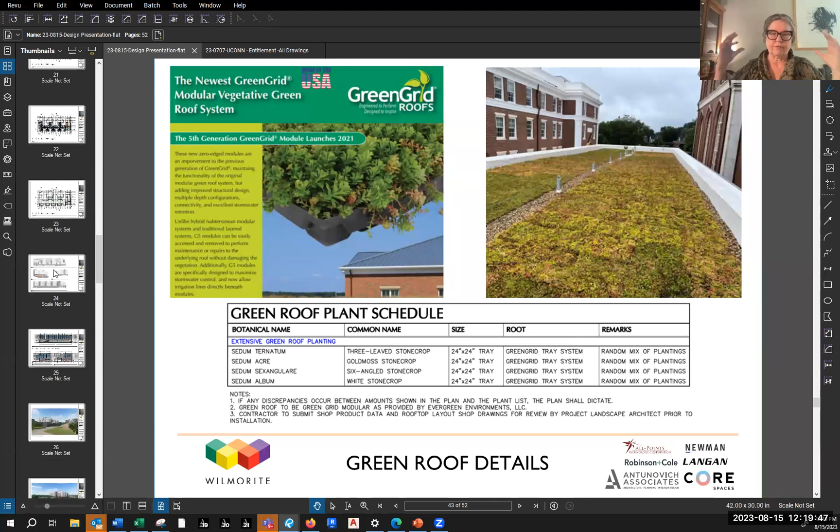There's some interesting things. On the other hand, I think there are some serious things that still need to be addressed in the design, and those happen at the ground level. Can you go back to the elevations? So all of the renderings you showed us are from an upper view, and for those of us who aren't birds, we'll never see the building from those views. We'll see them at the street level.

And I think there should be renderings of all of the buildings at the street level. I think that the trees obscure the street level in almost everything you've done, and that's the most important thing to the community, is how the buildings look at the street level. I think you've made a little bit of progress on the Eagleville Road commercial here, but it still doesn't read as a commercial entrance. The majority of the space along the ground on all of these buildings, if you walk around, is either a blank wall or a very, very steep slope leading up to the first level.

I am very skeptical about the maintenance of materials, although I'm far from the expert on that, and that steep of a planting area. So I'd like to see further studies. If you look at all of these walking on the ground level, you'll see that only at the little bit of commercial space are you looking, this is building A, at anything. The rest you're seeing either a steep slope going up or a blank wall.

If you go to building B, again, little bits of things, but mainly you're looking at either that very steep slope or a blank wall. So I think that there's a way to articulate that better at the ground level, whether it's arbors with planting, whether it's really studying the steepness of that hill and how it's planted and how it's maintained. Sun Yan might want to comment more on that, and I think more articulation of the commercial space, a clearer sense of where that entrance is.

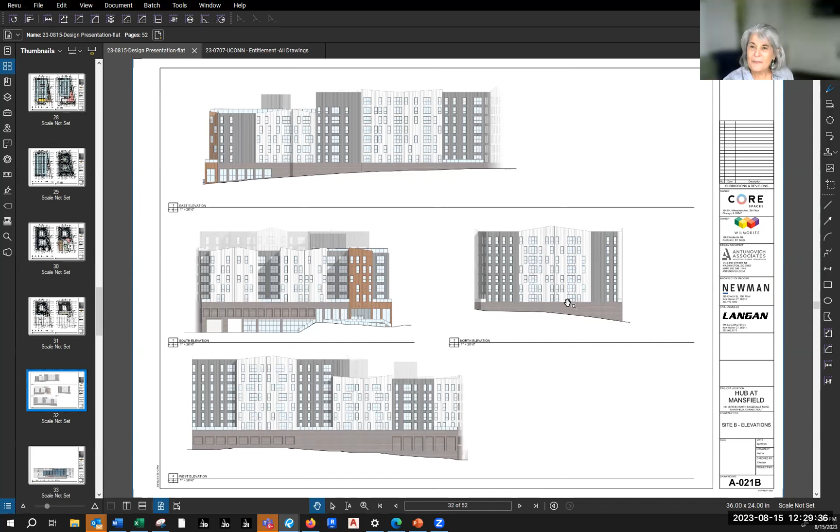Jeff, do you want to go? Yeah, I think I sense where Kathy's going with this sort of lower section. If you look at the north elevation there that's open, it's just this big blank facade. I don't know if that's on the street side, but if you go around the building, maybe there's a way to do something a little bit better there, especially along some of the major roads. So it's definitely worth looking at.

The only other thing I was thinking too is that mechanically, is this going to be heat pumps? What is this? What are you planning on? Is there any sort of solar?

Have you considered any other kind of sustainable heating, cooling strategies, or are these heat pumps? What are you planning on doing?

So currently it's a dual system. The main fresh air of the system is through a DOAS, and we're going to duct that from two units up on the roof, down through the corridors and into each unit. Then each unit has a heat pump system. Our DOAS units take the exhaust air back through the DOAS unit, so we can get recovery units and things of that nature. The DOAS coupled with the heat pump gives us great efficiency.

It cuts down on air interchanges between units, so passing of pathogens has been a big issue over the last couple of years. This seems to be probably the most economical as well as the best system to install in a multi-family building.

Do you have an estimate about how many heat pumps? I know you can bulk up units. We're not doing VRF, so it's going to be straight one-to-one. Some of the smaller units can be stacked, but for the most part it's going to be one-to-one - every unit will have a small condenser on the roof.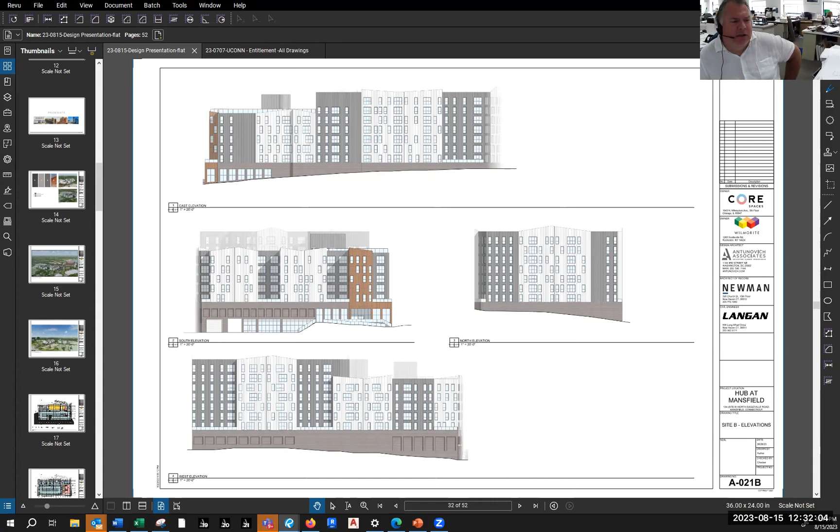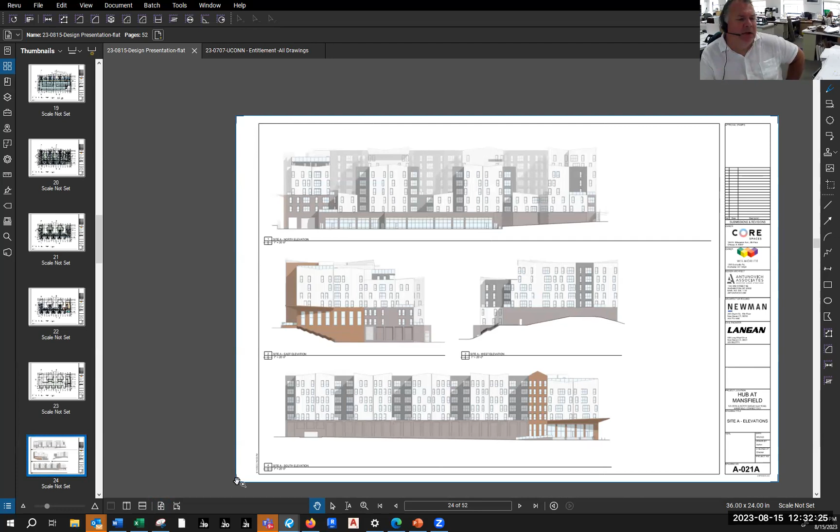And I like the way you've used the materials to break up the things. I would be concerned a little bit about the EIFS, but I know what you're up against - you've got to maximize everything you can maximize, and then not have a flat facade. You're going to use material, light and dark and textures to break it up. So I get it, but the transitions are going to be critical.

Absolutely. The goal for us when it comes to the waterproofing, I'd love to have the substrate of all of that material be continuous, and then we have our fluid-applied air barrier on that and everything's built out from it.

There are downsides to EIFS, but just to clarify, we're using a drainable EIFS system. It's similar to a brick cavity wall where it can actually weep, so we don't have condensation and all the things you've heard about EIFS over the last 15 years. We also get that continuous insulation quality, so we can create a greater building performance by using EIFS. We're going to get an R11 or so just in continuous insulation - that's not including the remainder of the assembly.

I can't wait to see a fitness center in some of these buildings where the students themselves actually exercise and generate power and electricity for the building. I don't know, Andy, is that something we could do? We get the pedal bikes and they just power a couple workstations in the lobby.

Anyway, that's all I had. Thank you. You can leave out the pedaling bike part. Right, I'll leave that one out. Yeah, that was your suggestion.

All right, how about So Young, can you chime in? Sure. There's a lot of overlap with what the previous speaker said, but I think this is a good location for the redevelopment - it's going to be a busy street with pedestrian traffic and maybe an opportunity to drive more human traffic. So I think it's good in terms of the location and the nature of the development.

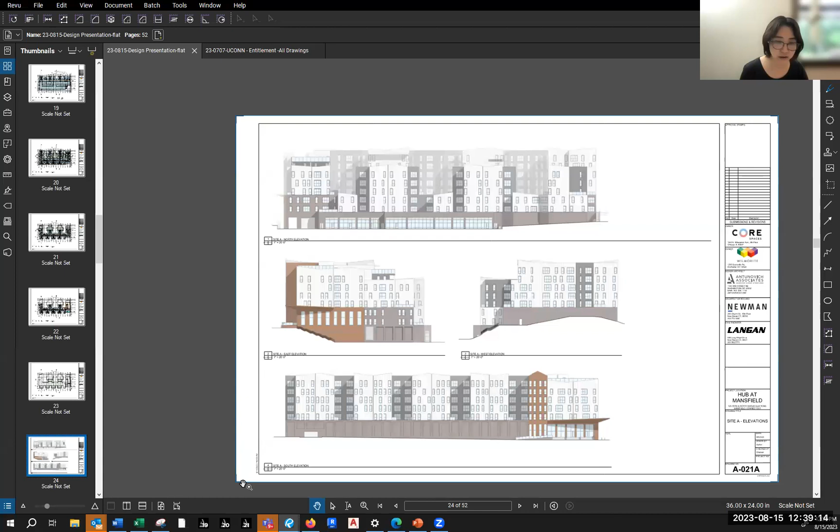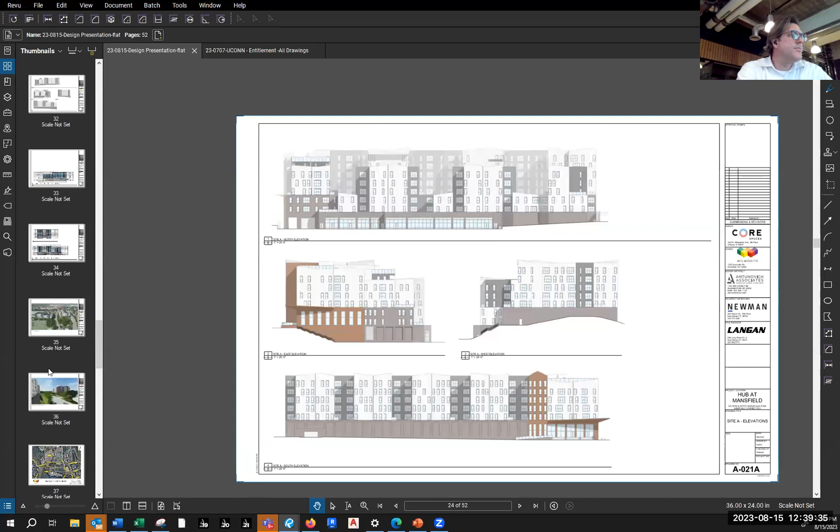In terms of landscape plans, I'd like to see a little bit more clarity in terms of labels and annotation. For example, if you are saying the basin - what was it, the basin, can you just help me recognize the rain gardens - so we have that exact species and quantity labeled in there, and the spacing.

So we have the quantities, the sizes, the spacing, each labeled, and then in each location. What you're seeing right here, we just took off the notes from all of our submitted site plans. We have every single hatch with an arrow pointed to it, with a number and a callout that relates to the schedule. In this slide we removed it so it wasn't so cluttered, but in the actual submission and resubmission it has that.

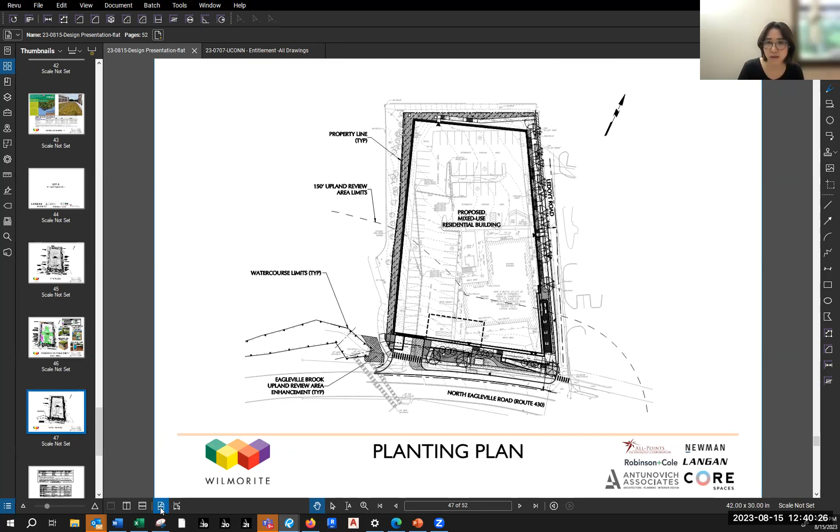So maybe for the detention basin, you can clarify if that's a detention tank or a vegetative detention pond, just a little bit more clarity on the legend on the plan. So that was it - are there any questions for her before I jump in?

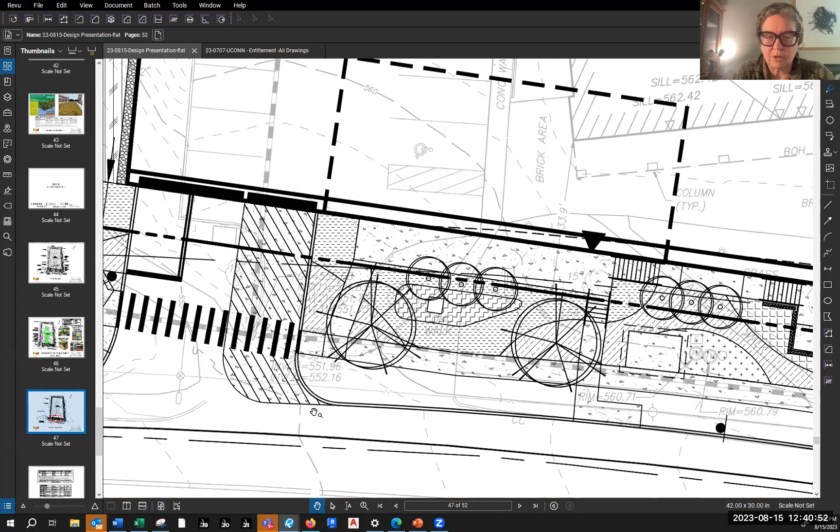So in the picture you just showed, the trees kind of block the commercial space there. I think that's worth thinking about. We spend a lot of time in commercial making sure there's clear views into the property, so it's worth thinking about.

Jennifer, going back to your notes about my comments, one of the things I said was that there needs to be more texture to the exterior walls. It was mentioned that cornices were being added, that might help with that. I see there's been work extending the red brick up and maybe extending the roof, continuing with that.

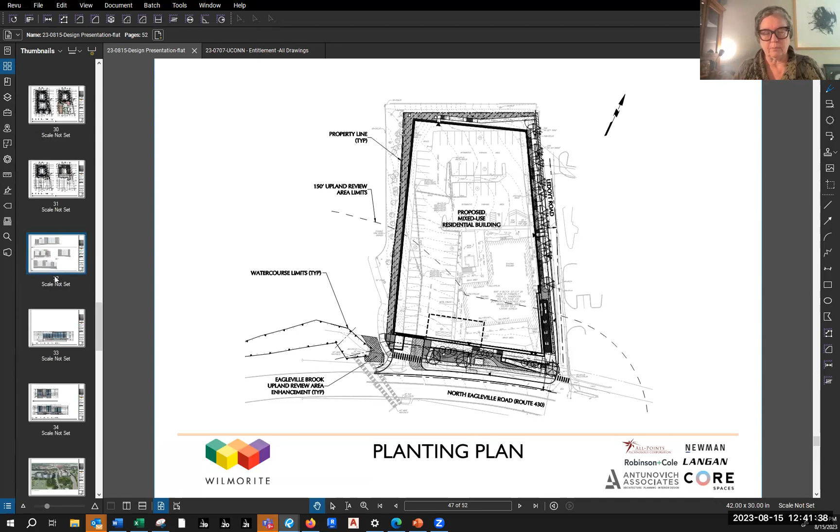But there might also be more texture to the window openings, with more detail around those openings to give them texture, maybe articulating the different exposures, so you have one way you express the south side of the building and the shading needed, and a different way on the west, east, or whatever.

I think there's been significant progress since the drawings we saw here. I'd hope that it continues. I'll add that to my notes, and for the design review panel members, I'm going to type this up, please make sure I've captured everything. Thank you, and sorry, I know I go fast.

No, it's okay, some of these terms are new for me. I have one question, and I wanted to know what the panel thought about this: in other projects we've asked them to add an educational component, and this is so close to campus, and you are using these low impact development techniques. Is there a way to interpret some of this to make it consistent with some of the campus signage?

Yeah, I think there's several locations where we apply green infrastructure features and low impact development. There's something new going on near my building, the agricultural building on the side of dairy bar, where you can see the steep slope near the hill. I think it'll be interesting if we can put some signage on at least a small rain garden there, not necessarily fancy, just a little wooden sign that people can understand how that little garden works. It can be perceived as part of the campus-wide green infrastructure network, and also the education component you mentioned, Jennifer.